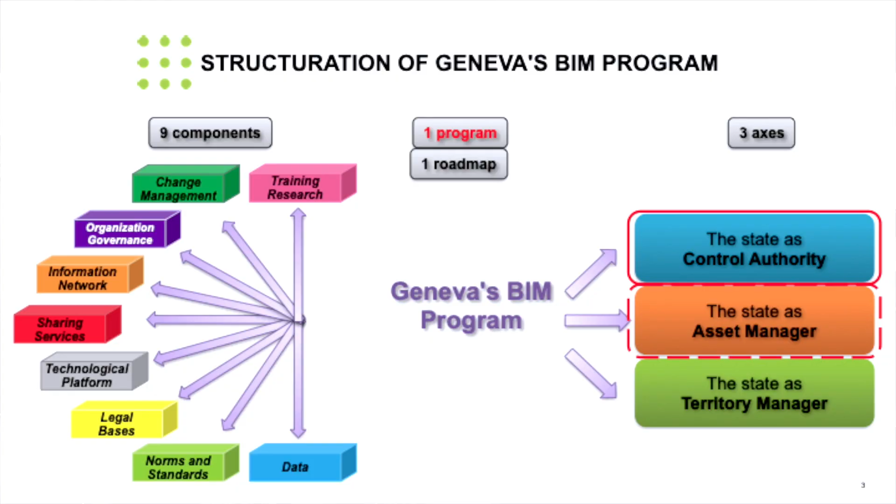So the strategy of Geneva for the BIM program is to be based on open BIM and only on open BIM. We only accept IFC for model, and also some other standards like BCF, which is like comments inside a model.

We also did our own development. So what I'm going to show you is our own platform that we developed ourselves inside the state, and it's based on open source. We took some open source bricks and put them together and made a really huge platform.

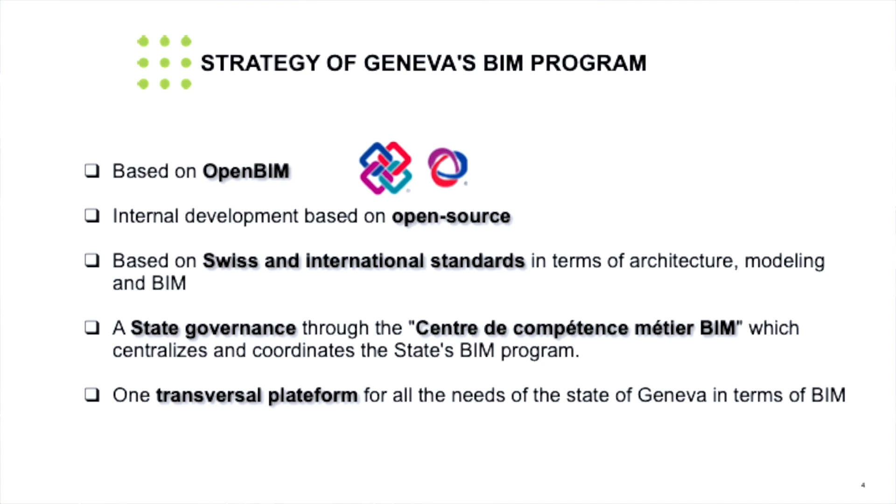Our strategy is also based on Swiss and international standards in terms of architecture, modeling and BIM. And we have the state's governance through what we call the Centre de compétence métier BIM, which is the center of competence for BIM, which centralizes and coordinates all the state BIM program and all the needs of the state regarding BIM.

So as I already said, we have only one transversal platform for all the needs of the state. So for all the 3 axes that I showed you just before, we have only one platform to do that.

Some steps in the BIM implementation inside Geneva States. It started in 2017, as I said, with the roadmap. Then I arrived in 2020 to be the head of the BIM program.

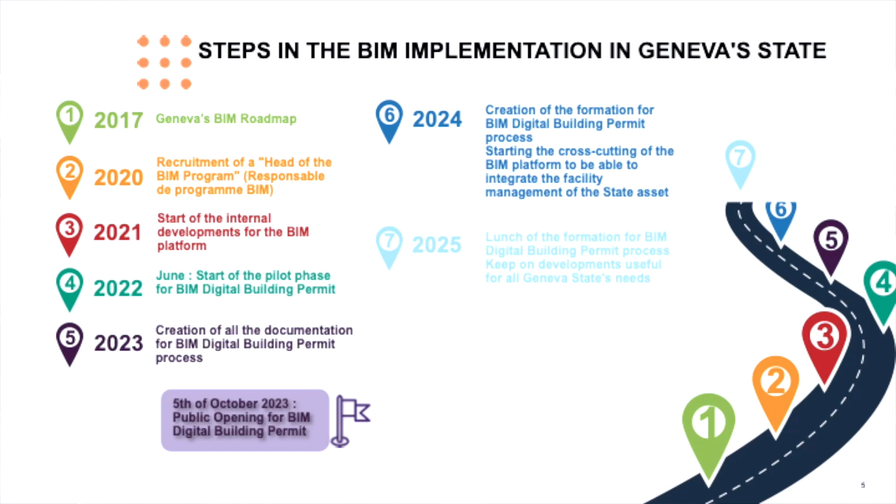That's when we really started to do some things for BIM, because before, nobody really had the knowledge to implement BIM and to know what BIM really is. So then we started our own developments for the BIM platform in 2021.

In 2023, we opened the platform publicly, in October. And now we are currently creating and finishing all the documentation, including documentation for training, and starting to implement BIM for facility management.

If I'm going inside what we are doing in BIM digital building permits - we didn't change the process. It's the same business process, it's the building permits. We just implemented BIM inside.

We have one standard for digital building permits that Manfred showed just before, and it's a self-checking tool - I will show you after. We give data, so GIS data and BIM configuration files, that architects and engineers can put inside their BIM software to help them construct their model.

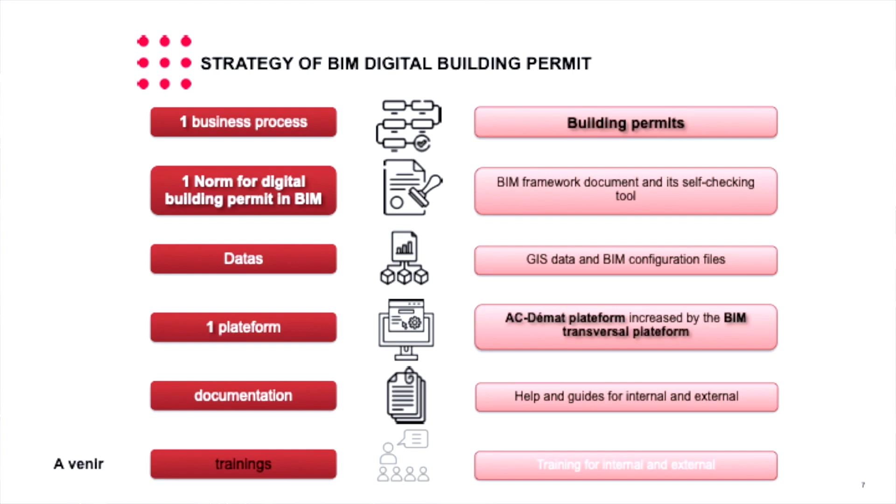We have one platform, the building permits platform, which is increased by the BIM platform, and documentation, and we will have trainings.

So the process is inside 3 main steps. The first step is inside the architects and engineer company, so they are preparing the BIM file. I will explain later what's inside.

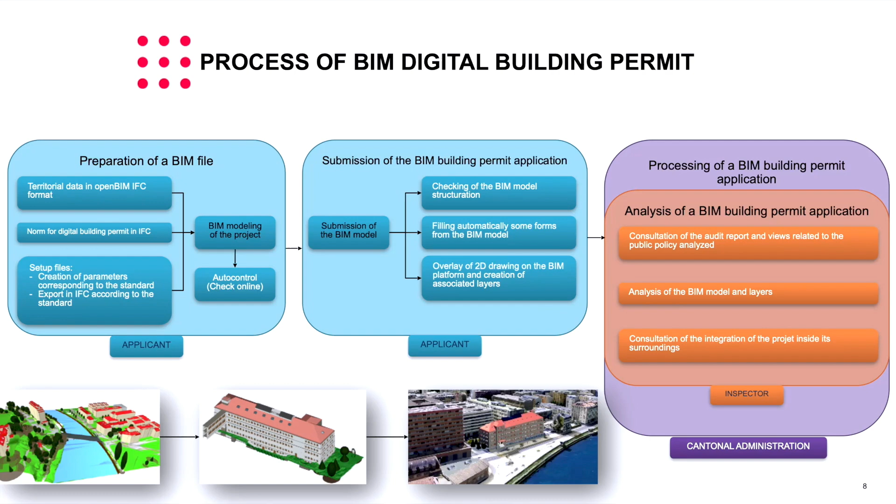The second main step is the submission inside the digital building permit platform, and then the processing of the BIM building permits with the cantonal administration.

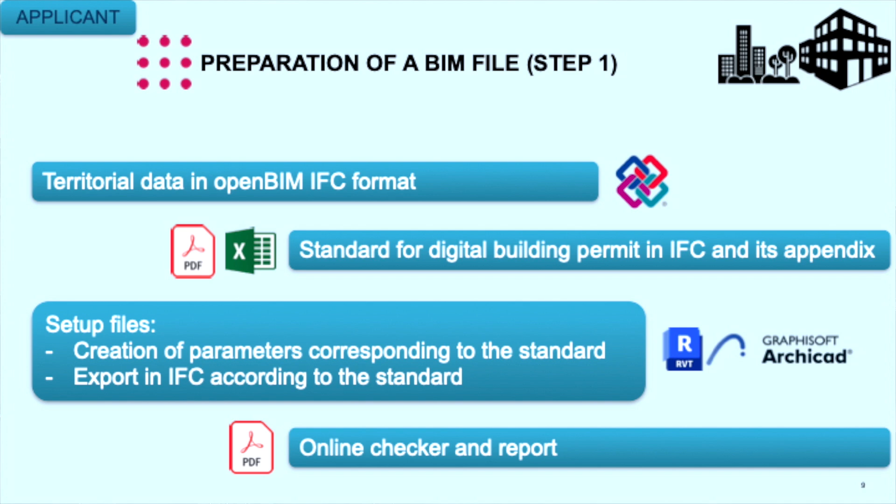So the first step, we offer territorial data in OpenBIM, IFC formats. That's the SITG site, and you can choose an area and extract IFC data.

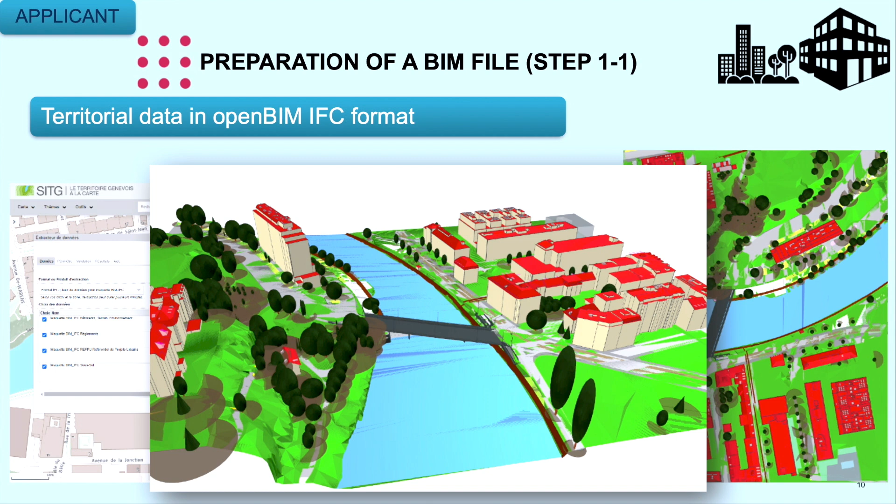It's more complicated than Manfred showed you, because we have all the data that we want put inside. So we have trees, buildings, bridges and so on. For now, the cantonal website doesn't have all this data, so we have to take it from Swiss Topo and so on. So we have 4 main models.

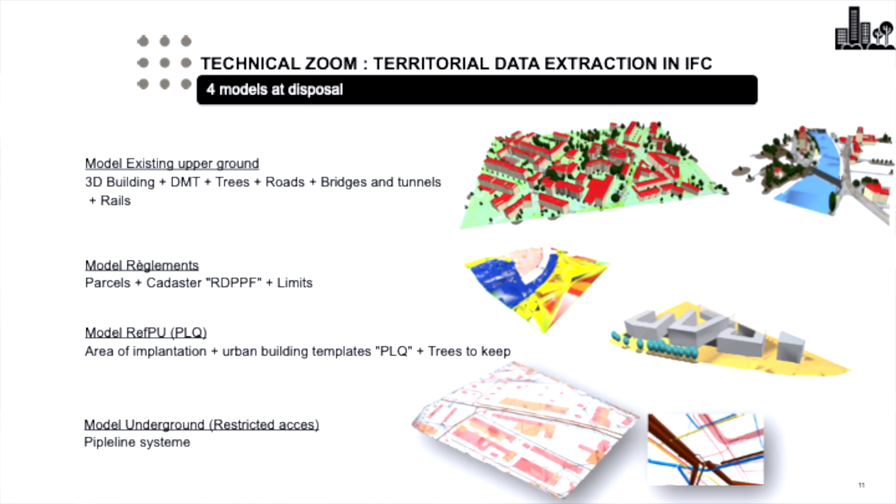The first one is what's upper ground, with the buildings, the trees, the road, the bridges, and so on. The second one is the parcels and the cadastres. The third one is what we call PLQ in Geneva - it's the area of implementation of the new project, urban building templates. And the last one is all we have underground with the pipes and so on.

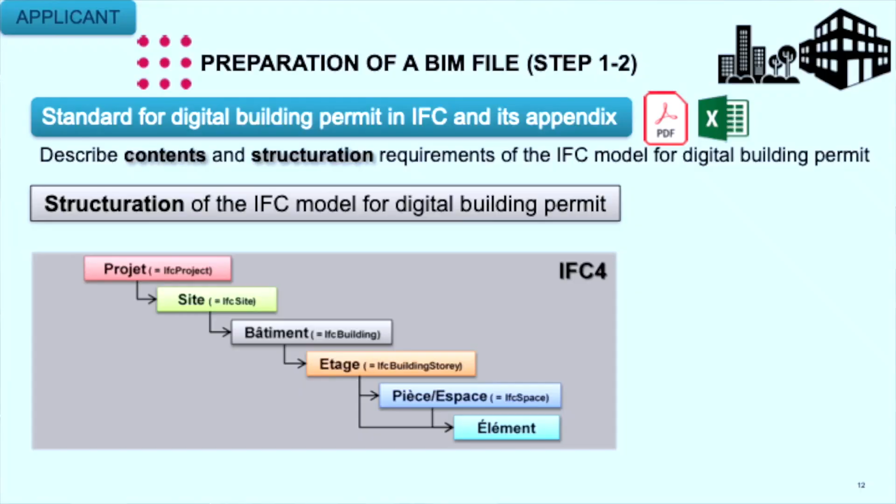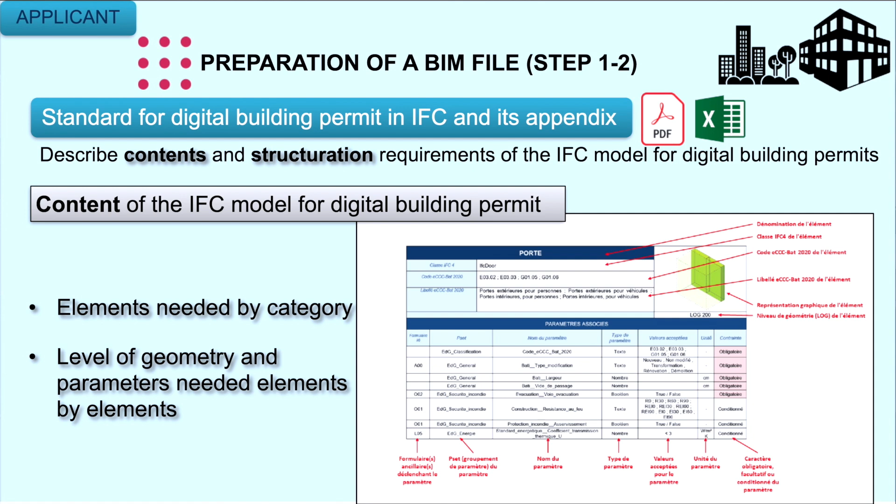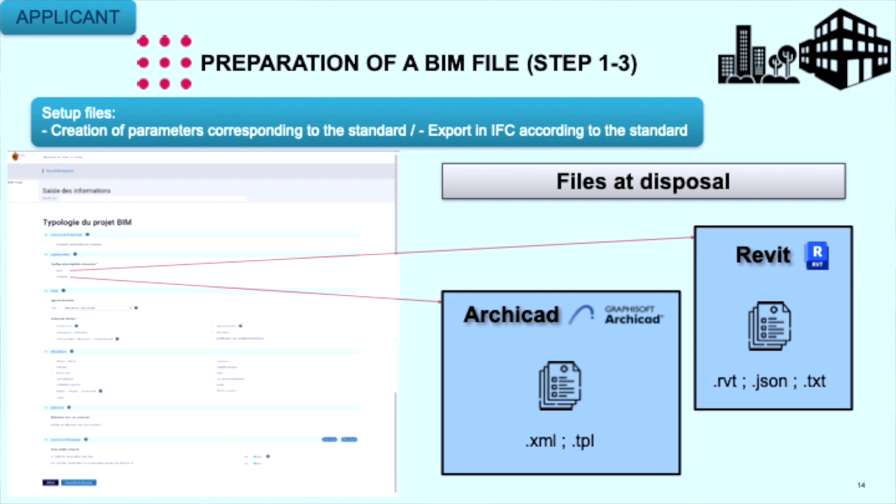So now architects with all this data can prepare their BIM file. There are standards with what you showed before, with all the objects and what kind of data we need inside. To do it, we expose some configuration files for the two main BIM software, Archicad and Revit, which is really the main software in Geneva - 99% of architects and engineers use the two of them. It's all the files to prepare and to put all the parameters that we need.

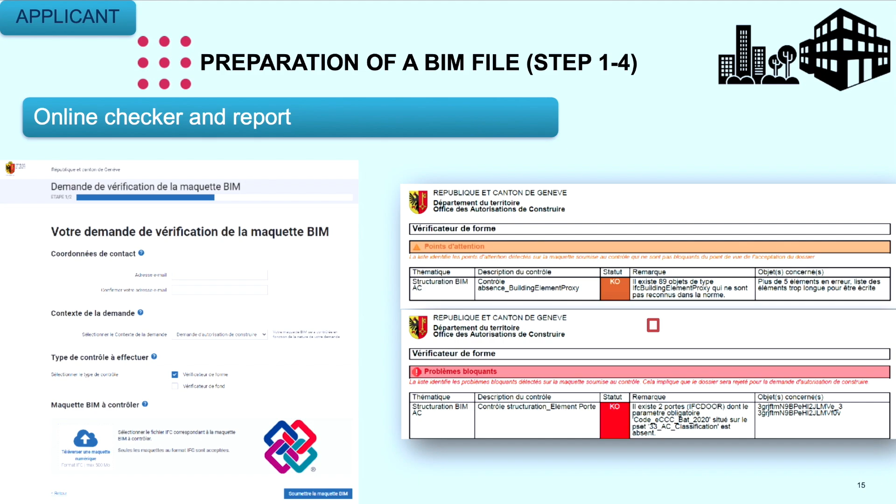Then you have an online checker. You just need to put an email and your file. It will be deleted 1 hour just after the check. You can control if you have some problems, if you have some parameters missing or not in the right standards, and you can do it every time you want until you have 0 for the blocking points, which is blocking the submission afterwards.

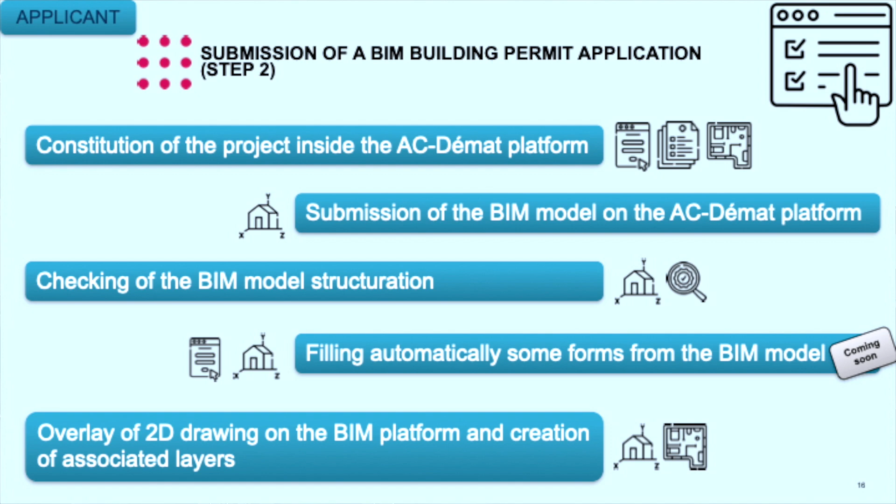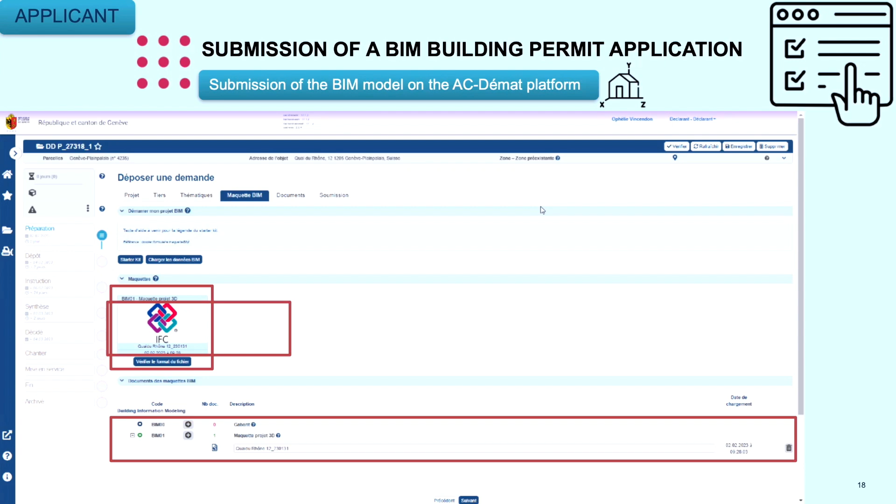Then to submit BIM building permits, you need to create your project inside the AC-Démat, which is the platform for building permits - it's the same for BIM building permits and PDF building permits. So you create your project and put the documents, and inside the documents you have the BIM model to put. So you search for it, you put the BIM model, and then you check it. It's the same checker as the online checker, and it will put the report inside the platform. You have 0 blocking points, so you can continue.

It's not yet in the platform, it's an evolution, but you can fill all the forms, or some of the forms inside the platform with the model. So all the data inside the model will fill the forms that you need to fill before submitting your project.

Then here I need to launch manually. So then you can overlay the 2D drawing to the BIM model, because the problem is that legally what counts is the number in the 2D plan, in the 2D drawing - it's the number which counts legally. So we need to have all the quotation inside, and for now the BIM model is not able to have this kind of numbers easily. So you overlay the drawing, and then you have the project.

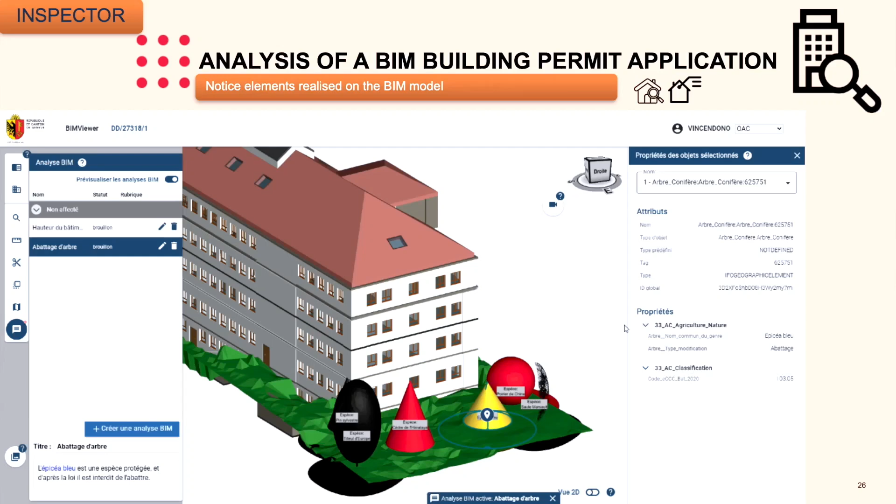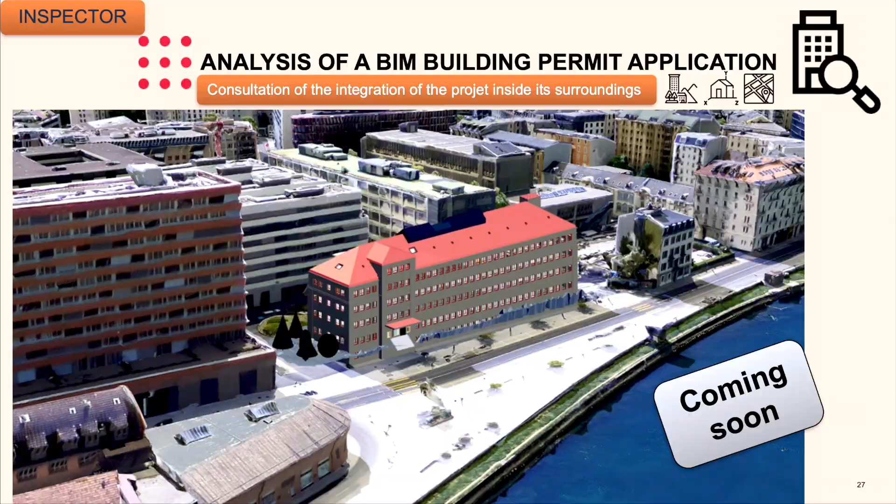And then, as I said before, the BCF, the format that is common on BIM, the inspector can put a comment, and afterwards the applicant will see this comment, which is localized inside the model. This is coming soon too - this is the way to see the project inside its surrounding, because for example, for the architecture commission, it's really important to know if it's right with the surrounding.

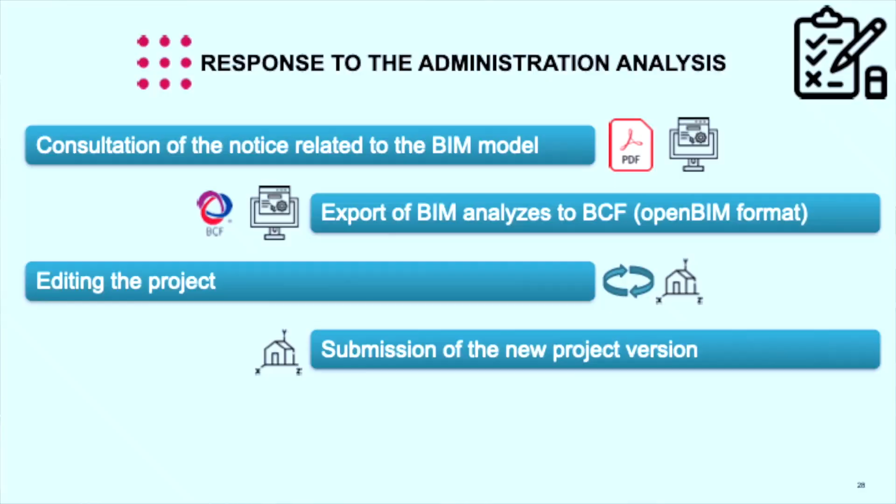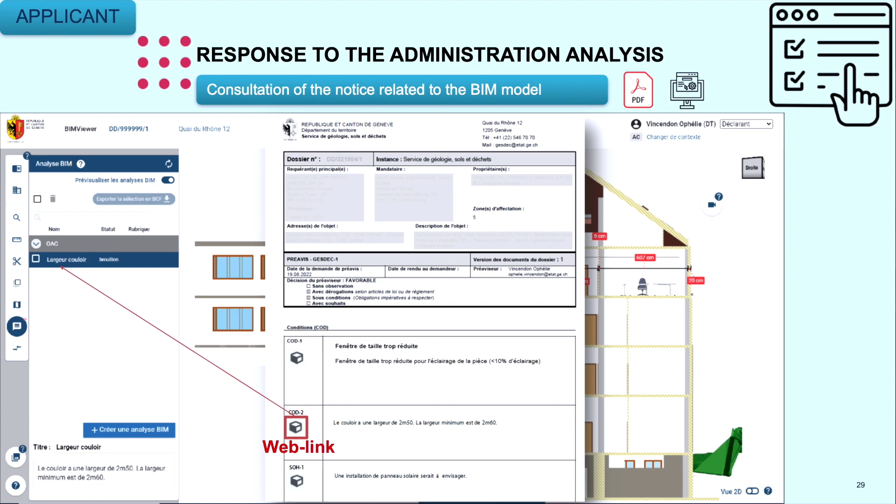And then the last part is the answer to the administration from the applicant's view. So here you see the notice - it's a PDF notice, and here, if you have a little cube here, that means the notice is inside the BIM, and you can go inside the BIM, see what's the problem, and export in BCF to be able to have it inside your BIM software.

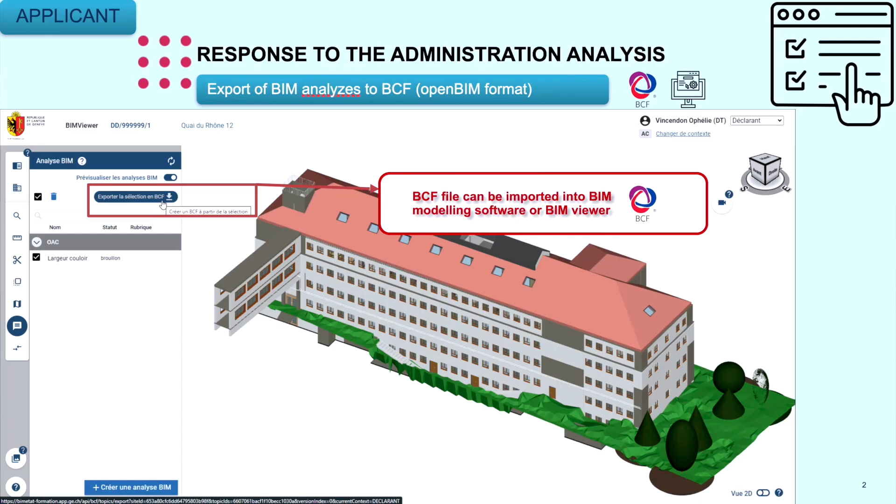And that's all. Thank you.